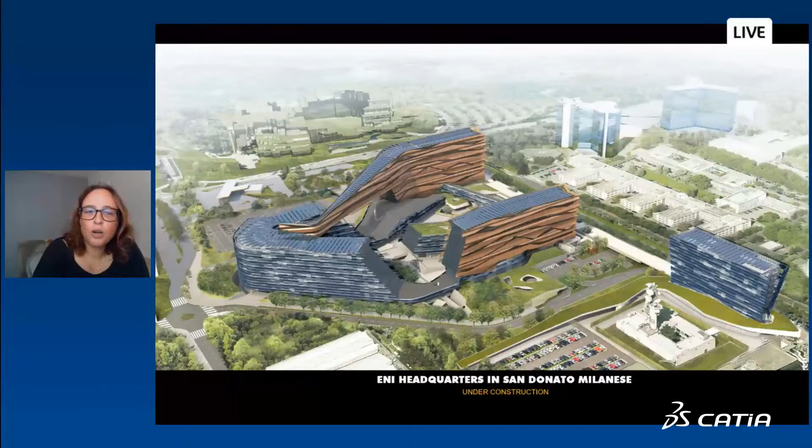So I think that is part of this underlying organization that we have, to try to systematize some of these processes. This is the ENI headquarters in San Donato. It's in Milan, Italy, and it's under construction right now. And this was also a competition that we won. And we used CATIA pretty extensively on this project. We used it on the exterior facades and the shaping of some complex areas that we have in the project. And the project is also an interesting approach where we're actually lifting the landscape and creating a more layered kind of urban condition.

Now, the facades themselves are 360 degrees round, right? So we're looking at a performance requirement in terms of solar insolation and other elements in the facade that may help us design or define the shape and types of coverage that we want to have. So these are some of the construction pictures where you see the glazing, and then on top of that, we lay out a perforated panel skin element that you saw in the first image, which is two different types, one blue, one orange, we call it. And those are stainless steel panels that go over the project. So the design of that facade was quite a large project.

And then you can see also here beneath that, the bones of the buildings are also very carefully crafted, and we have these large cantilevers for the pedestrian bridges that connect the buildings together. We also have other very intricate strategies for how the tectonic of the building is put together, and I think all of that is possible because we're really careful and paying attention to all these different pieces of the puzzle, right? And we're able to really coordinate them and retain a certain level of control.

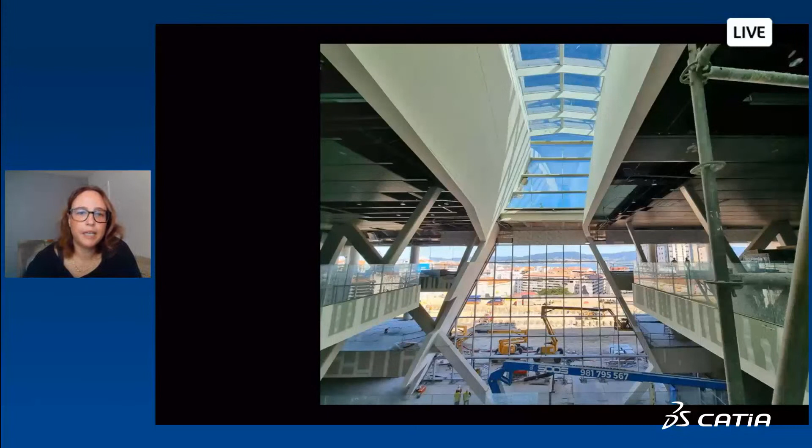And then this is the central atrium that's under construction as well, where the main terminal is when people are entering and exiting. You can see that because we are pushing the tectonic and how pieces are coming together, the geometry and how that plays, we really need to have a strong approach in terms of the digital control that we want over all these assemblies in order to make the project feasible, constructible, and on budget as well, right?

So those are obviously always us trying to deliver an architecture that promotes the client, what the architecture is going to be used for, and then also obviously making it globally something that is efficient and that performs at the high level.

This is a really, really good project that we have under construction in China right now. It's in Nanjing, and it's a conference center, and it's almost 2 million square feet, right? So it's quite big, and has a tower. The tower is a hotel, and the main conference area is that lily pad, or that plinth element that you have underneath it.

And that one also was partially worked in CATIA. And we also coordinated all the exterior shell envelope elements in CATIA just to make sure that we're tracking materials, quantities, etc., all these things.

And obviously, part of the work that we do is that we present you a roof that has thousands of metal panels, and behind the scenes, we're obviously not proposing thousands of different panels. We're proposing something that looks very unique, but it actually is made out of very repetitive elements, and the assemblies are also using a lot of repetitive elements.

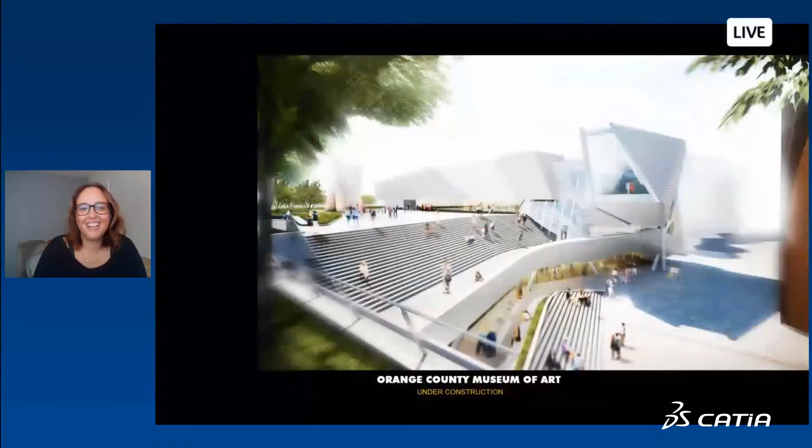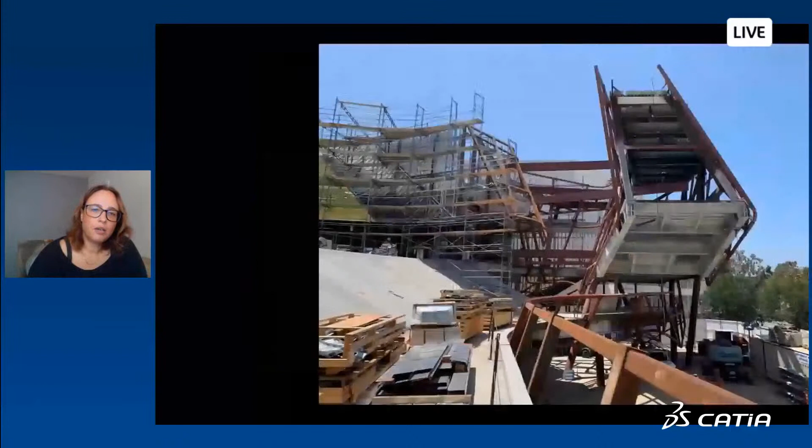This is the last project that I wanted to show you today. It's the Orange County Museum of Art. So this is a very small museum, and it's local to our office. We are in Los Angeles, so it's very close to here. And this is a project that is also under construction right now.

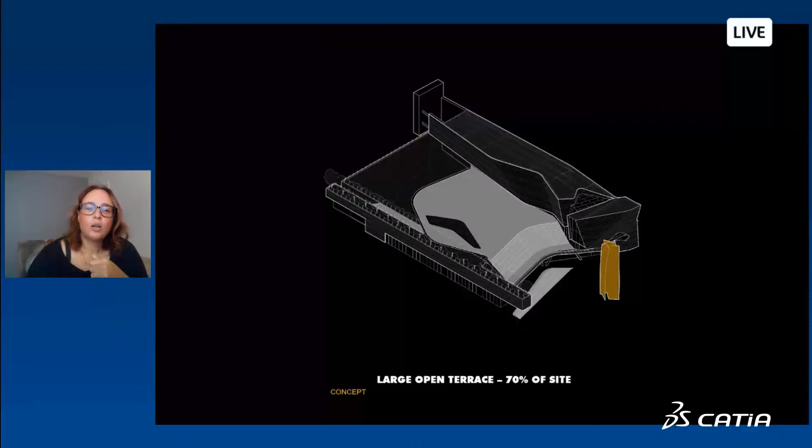And again, on this one, we manage two spaces in CATIA, the exterior envelope and the interior atrium. And the atrium is located right here. Right, so we have an interior space and an exterior space, and we have again larger concepts about what the architecture is, what does it do, how does it represent the philosophy of the client, and how we can also try to utilize public spaces and create green spaces within the architecture.

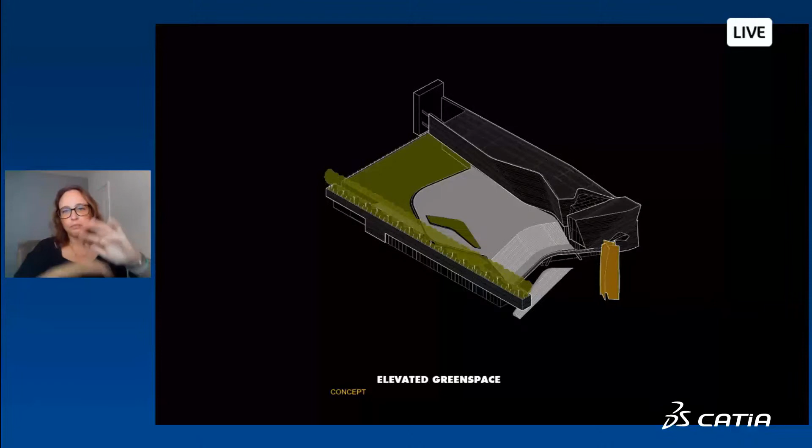So again, I just wanted to mention that because there's a bigger, obviously, philosophy about what architecture is and how we're putting it together. And again, our workflow always functions with analog information. So we do have a back and forth between different types of information, and it always is integrated in the workflow. So we'll have a high focus on data. We have focus on documentation, 2D drawings, 3D drawings, and we'll also have immersives in the workflow.

And so that's where the crux of this whole system is, to be able to go back and forth without stopping and going every time, because we need to move from one thing to the other. And so this is our CATIA model.

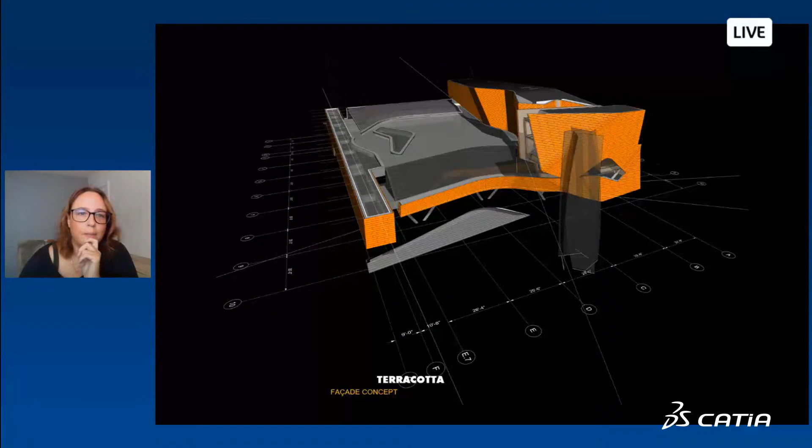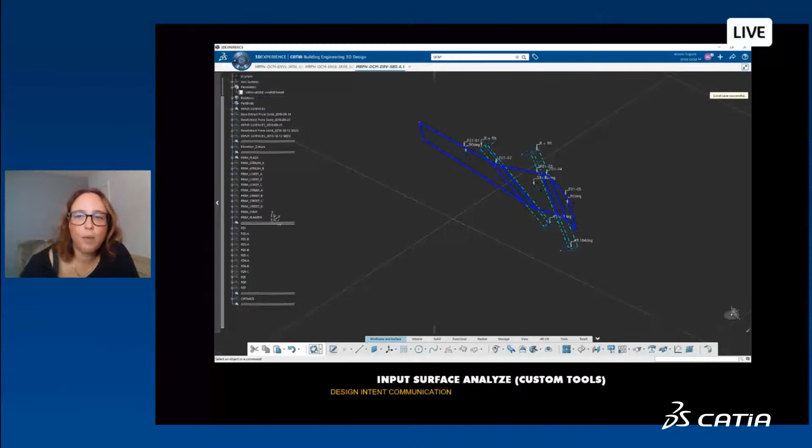And what we do in CATIA in this particular project is that we did not necessarily form or shape the building directly. So what we did is that we bring the information, the form, right, the sculpture of the building in CATIA, and then we run a series of internal tools that start to break down the information and rationalize it on the big picture. So it's like the DNA of the architecture, and it also extracts a series of information that we're going to be using in our drawings.

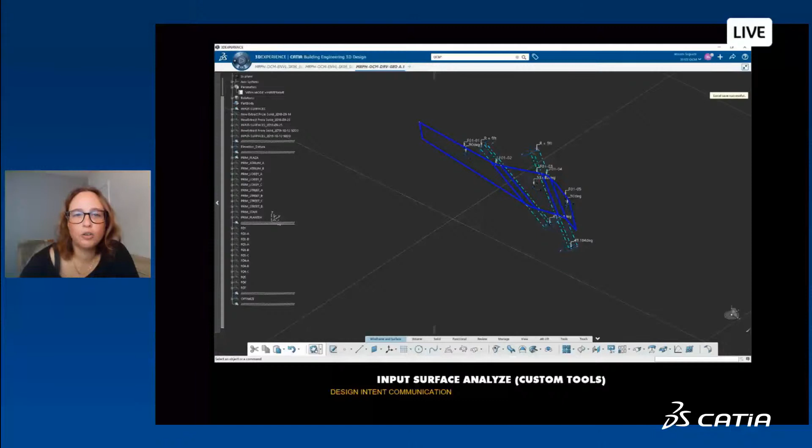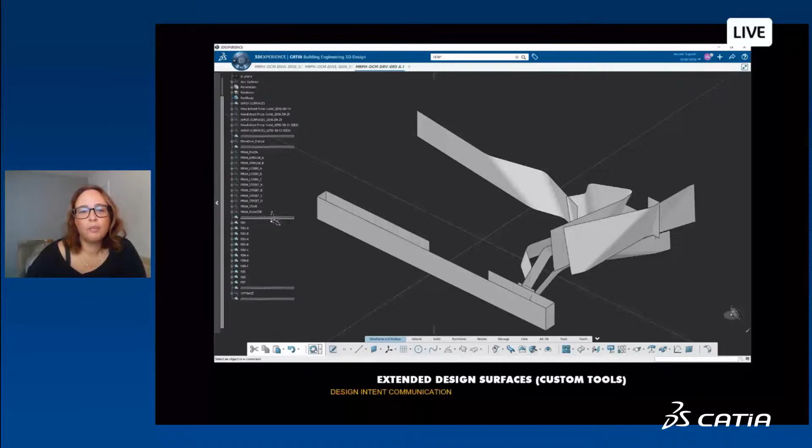So in this case, it would probably be like geometry information. It rebuilds the baseline surfaces as well, so that we can have a broader canvas on which we can start to look at the facade. And we do that for the entire exterior scope that we're going to be working on in CATIA. And then obviously that's the final filleted portions of the project.

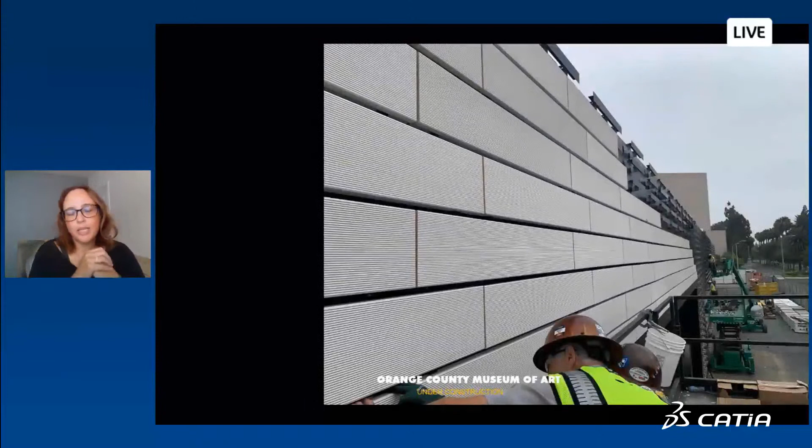What we did on this project is that we made a pattern of flat tiles of cladding material, which is terracotta in this case, on the entirety of the exterior. And so we did a lot of research about, first of all, understanding how do we manufacture and fabricate the tile, and then can we create a tile that doesn't need to be too complex, because if we lay a panel horizontally, for example, on this, every single tile would hit the geometry in a different way. So we would have to twist everything, right?

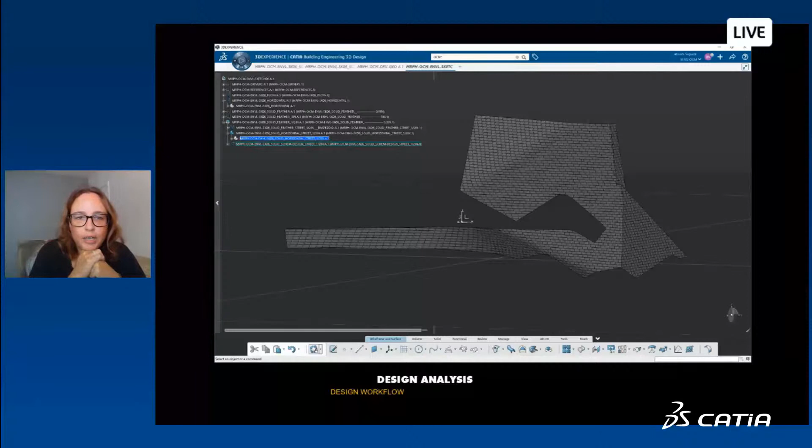So we did a lot of strategizing and design work that allowed us to create a tile system that would flow over the geometry and allow the tile to remain single curved and rectangular throughout the project, and work with the facade. And so once we found that, you can see a little bit here, the tiles are doing this, and then they're doing that. And here they're starting horizontally, but then they flip here. So there is a subtle, well, it's not so subtle on the interior, and I'll show you that in a moment, but a subtle way to populate the tiles on the building.

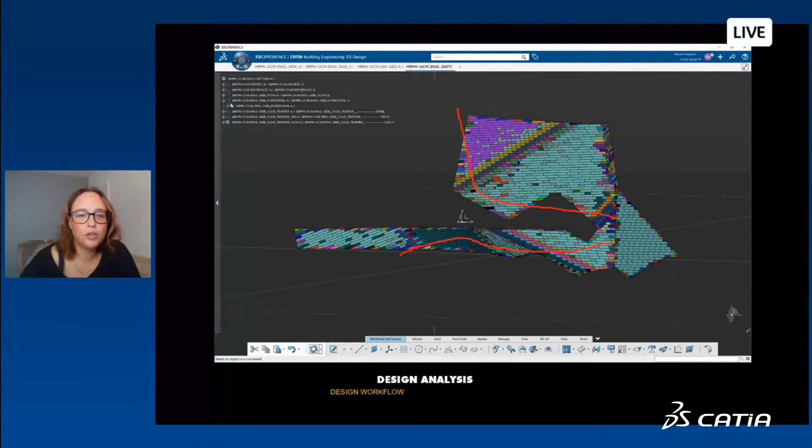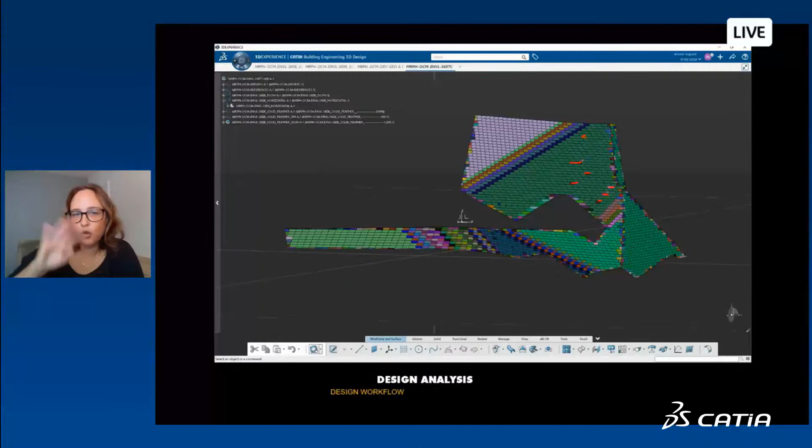And then obviously we are working to optimize the system so that we minimize the amount of unique tiles. Now, the uniqueness in the tile has a lot to do with the size of the tile, because we want the pattern to have a certain staggering look. But then there's also how the tiles hit each of the cylinders, right? A very specific way.

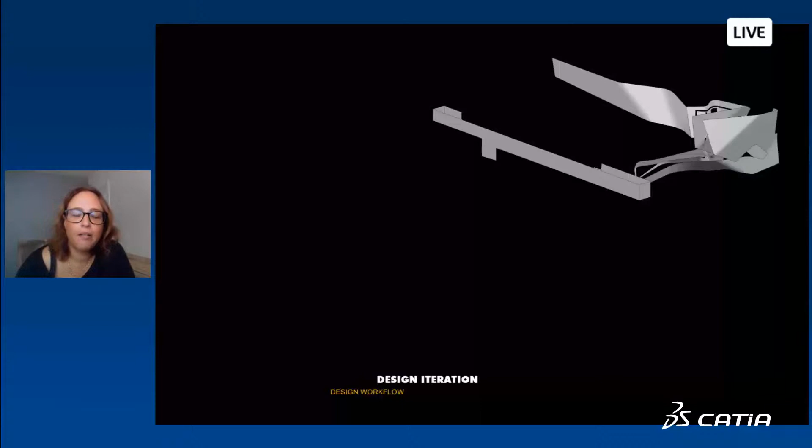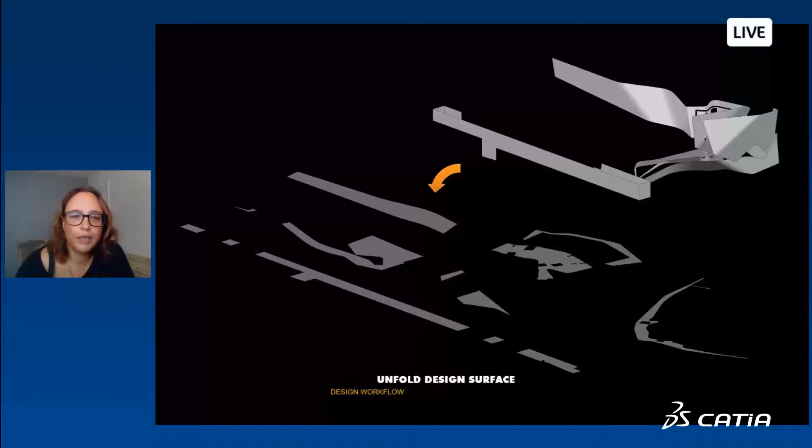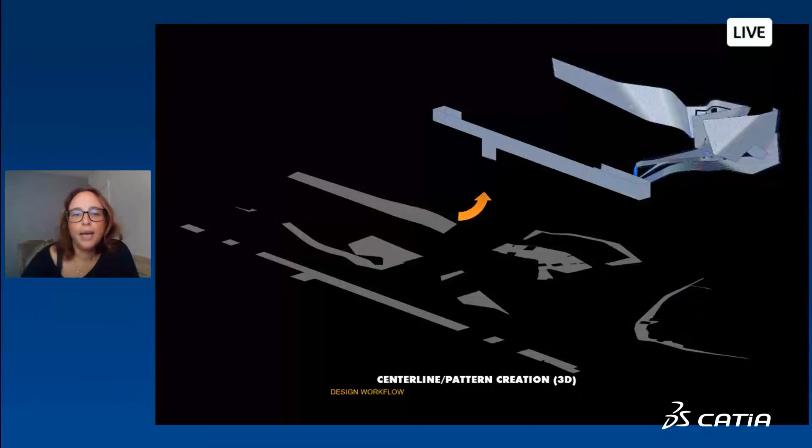The process is happening in CATIA, but it has a couple of loops in different softwares as well. So we're writing interoperability tools that allow us to share the information instantly, or at least very quickly, without again causing us to have to stop the process. So the surfaces, once they're optimized and extracted in CATIA, they get unfolded. A pattern gets laid out on the surface, and then the pattern gets folded back on the surfaces. And what that means is that every single tile, as I said, would remain single curved if they need to be, or flat, but they are all rectangular with 90-degree angles.

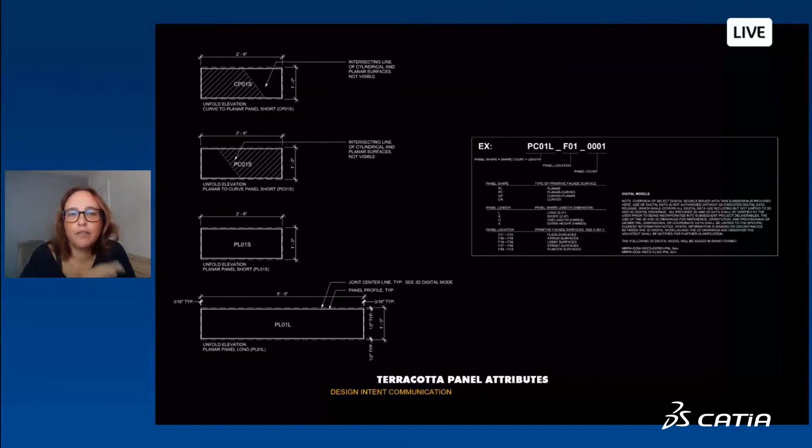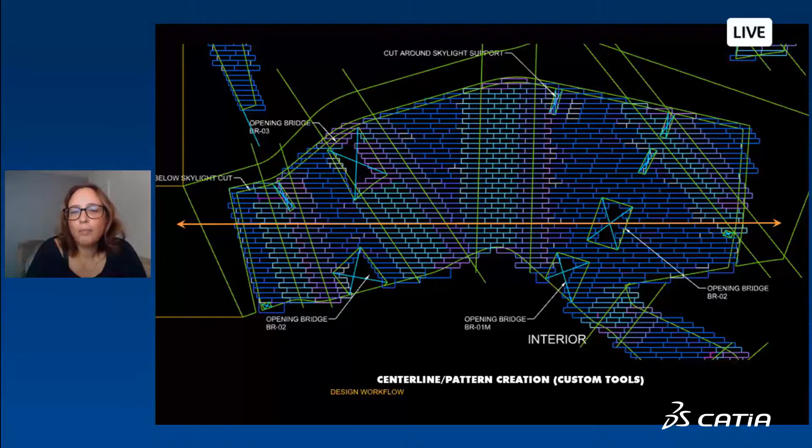And so it's linked to the way terracotta is being fabricated and how we process that. And it's also creating a very rational, regular tiling element, but that allows us to create this kind of architecture. And this is, again, when the tiles are unfolded in CATIA, it's also generating a series of line drawings and already some information that could be used later for documentation.

We obviously in advance did a couple of workshops with a terracotta fabricator to study the tile. And those were some of the work that we did with them to try to figure things out. And here is, again, the flat tile on the flat surface, how it's been laid out one by one.

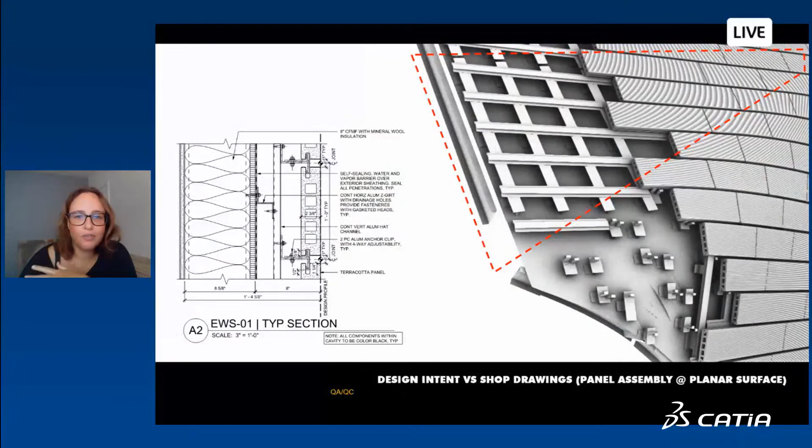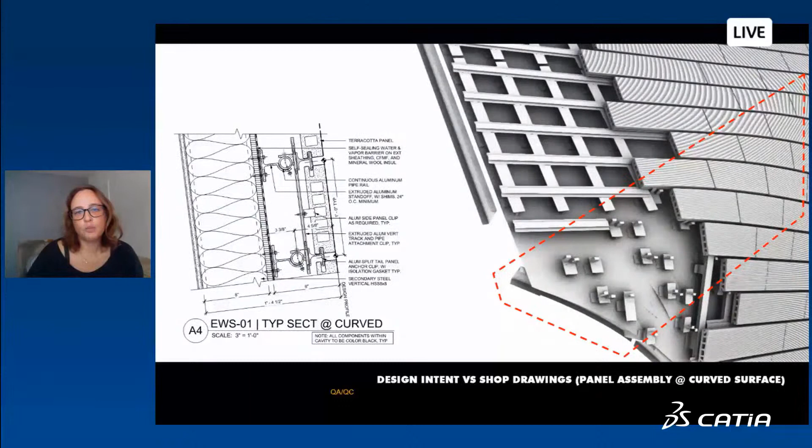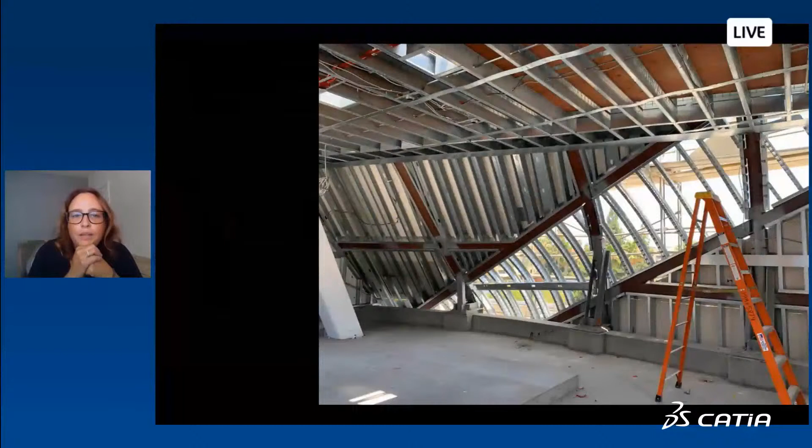And then we also study, again, different levels of detail, the relationship between the flat portion and the curved portion. So each of them will be attached in a certain way. I'm showing you this to show that we are actually looking into the fabrication process, but also the erection process and how these things are going to be supported on the wall, just to make sure that what we're proposing makes sense, and that it works with the ideas of performance and buildability.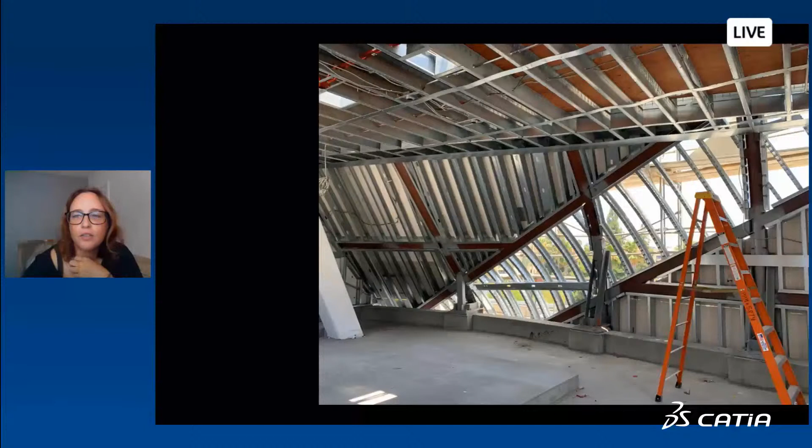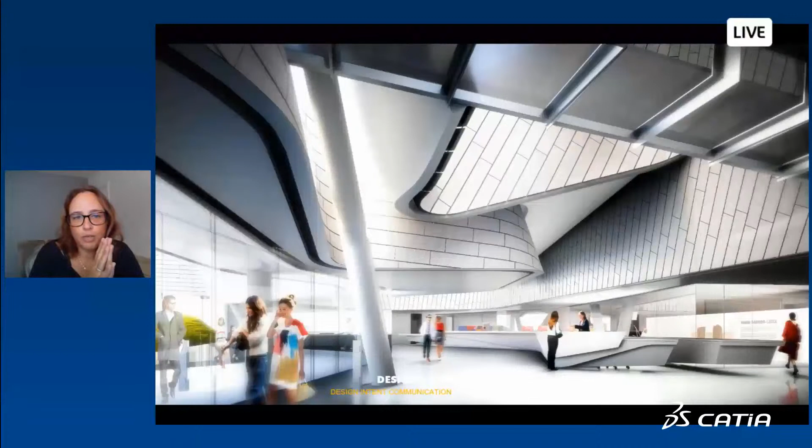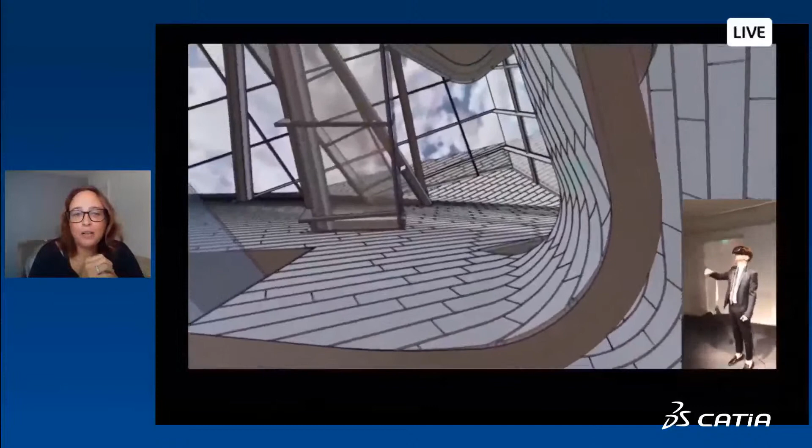This is an image from inside the project, where you see again that transition between a flat surface and a cylindrical surface. And here is where you see mostly how the patterns will flow around the wall. So it's very important for us to have the building itself connect completely geometrically and parametrically to the tiles, because every time the geometry of the building changes, we are confronted with movements everywhere. If a cylinder changes direction, the tiles of the whole building will have to adjust. So being able to design it this way helped us tremendously.

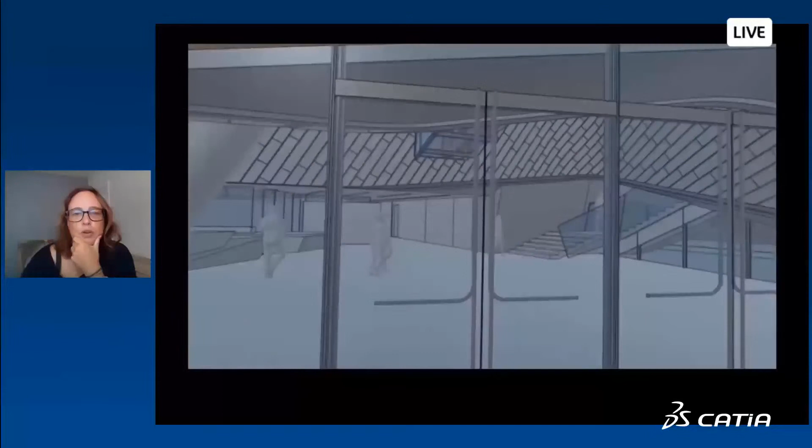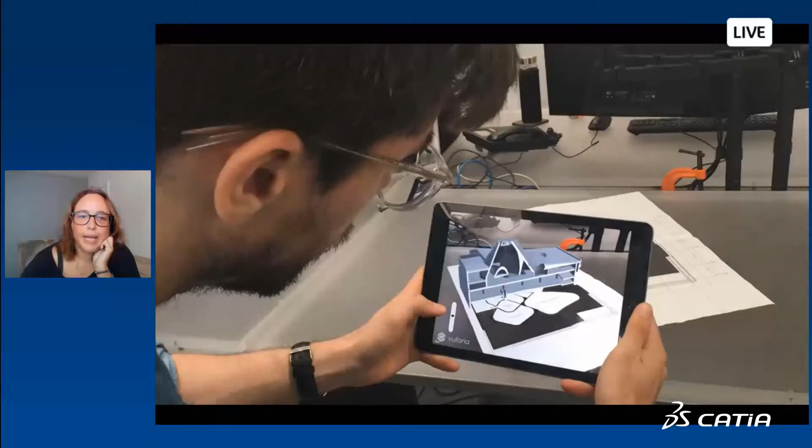And then I wanted to show you also some of the images from some of the immersives that we had. In this particular project, we were working internally, but also with the client, on different ways to visualize some of these more constricted and complex spaces, like the atrium. It was very interesting for us to be able to bring them in a way that is more three-dimensional, and they don't have to necessarily understand a drawing or decipher a rendering, right? So they could actually be in the space.

And so we're using these techniques very often to either expose the DNA of the building, the understanding of how the pieces are coming together, but then also just as a way for them, or us even, to understand the relationship of the plans that they're receiving, for example, and the actual three-dimensionality of that.

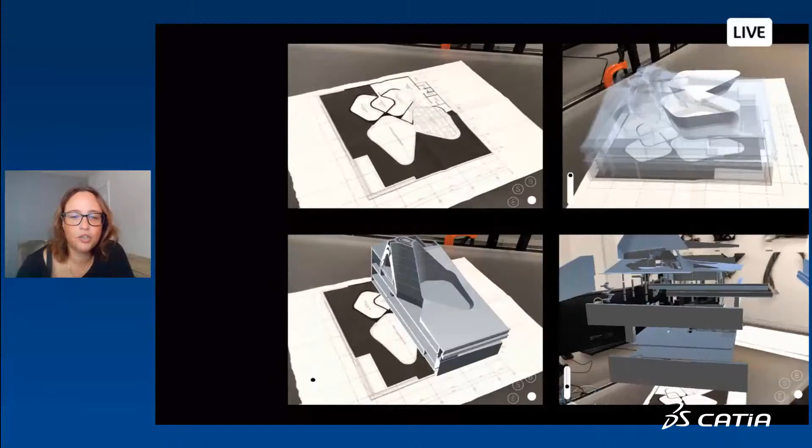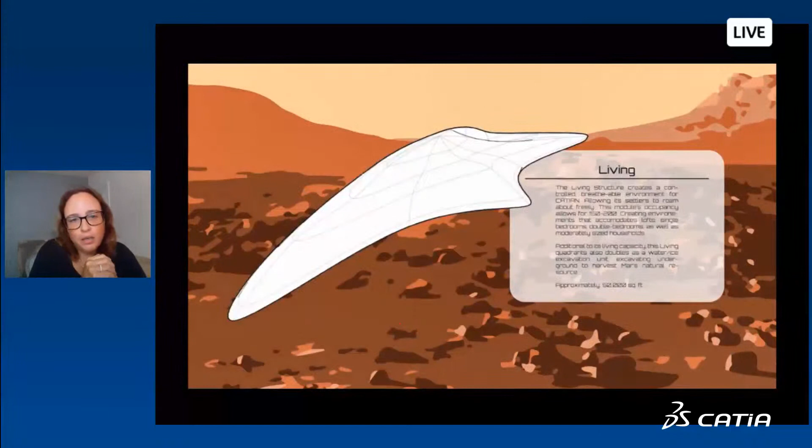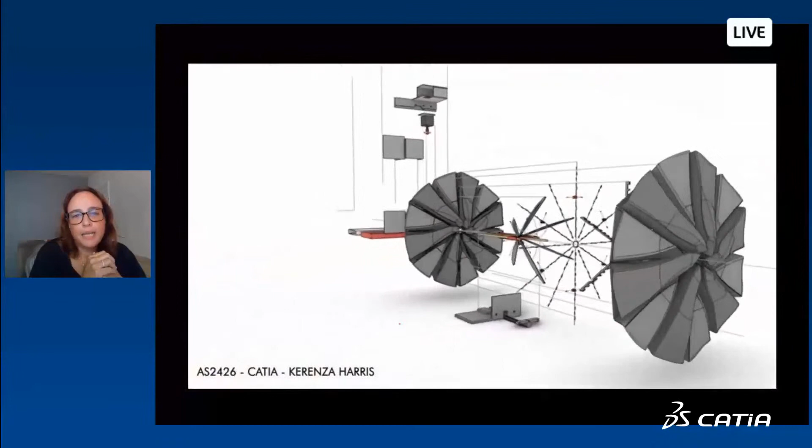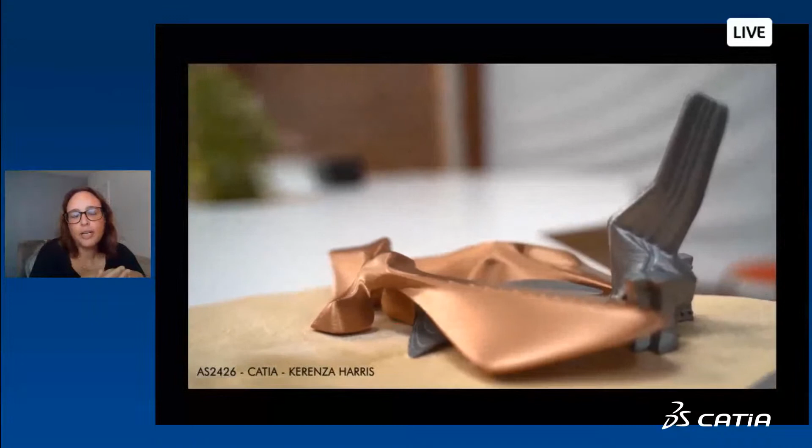And then we're also working with schools. So this is the academia sector, teaching a CATIA class or 3DEXPERIENCE class at SCI-Arc, which is in Los Angeles as well. The same techniques that we use for our office and the way we practice architecture, we translate to the students as well. As they're learning how to use CATIA, we're also using some of the collaborative apps, SWYM and communities and things like that.

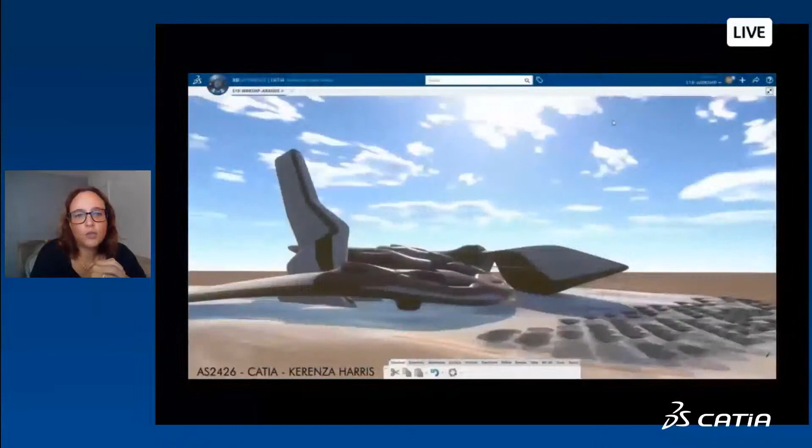And so it's trying to get the students to pull from different sets of tools and put them together to present a final composition that has been developed in many, many different ways, just to communicate their ideas. So they're using a lot of different tools in order to do that. They're not always within CATIA, but it's definitely driven and centralized in CATIA itself. So I think that's all I had for today.